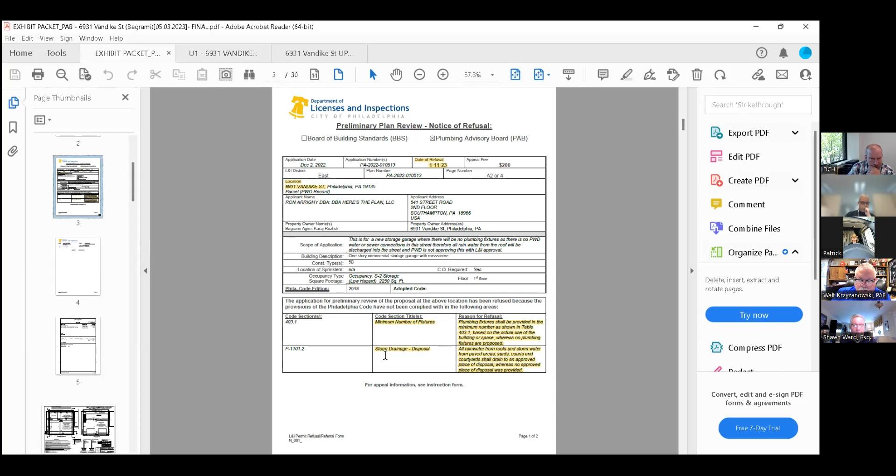We have the plans that were submitted. As you can see, this is basically a one-story garage with an interior mezzanine. It is proposed for the storage of contractors' equipment and materials, and that is it. There will basically be no human occupancy. We're not looking to have an office here, or to do anything other than store materials and vehicles at this site.

Moving through the plans, here's a copy of the deed just to show that he has standing to be here. He is the applicant owner.

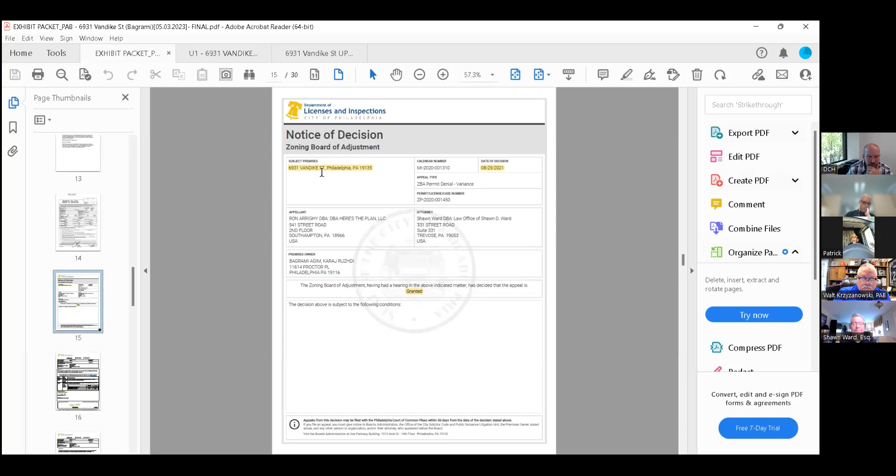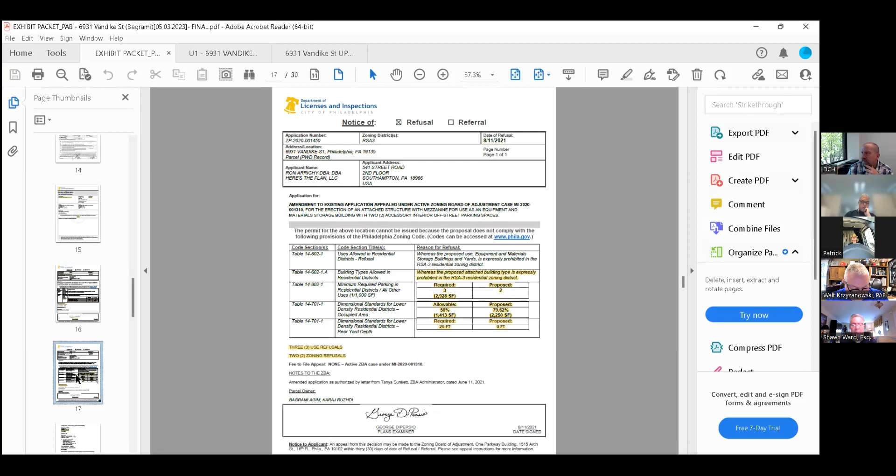The notice of decision from the zoning board granting the variance to construct this building — that was the original refusal. We sought relief for the minimum open area, the minimum front setback, and the minimum rear yard depth. I'd point out to the board that the building was shifted back from the frontage sidewalk to accommodate at least a 10-foot setback, as requested by Tacony Civic. They weren't as concerned about the rear yard as they were about this building fronting right up to the sidewalk, so we accommodated that request, and it was made part of the zoning board's decision. There were also some other variances for parking and density in a residential district. Having said that, Tacony was not opposed to the application subject to those conditions.

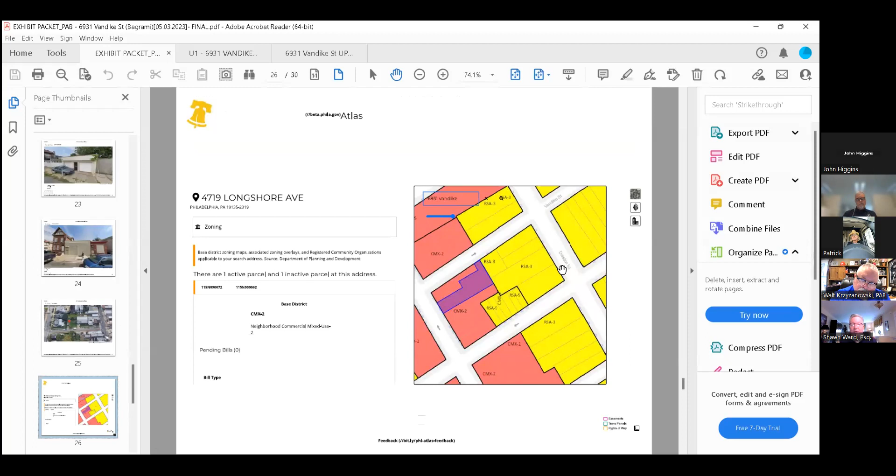John, I'll keep my screen up — oh wait, I'm sorry, let me pull up the utility plan. I shared this with Phil this morning, and Ron Arrighy, our representative from Here's the Plan, shared it at 1:51 a.m. because he's in Europe, sent it to Phil.

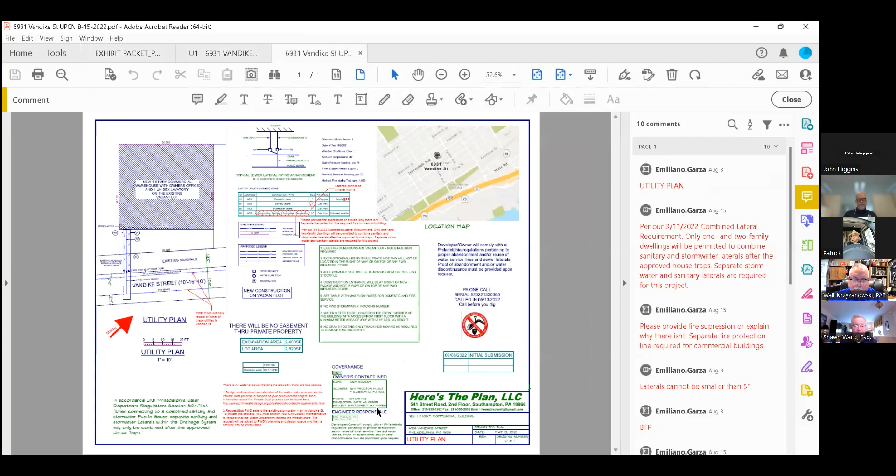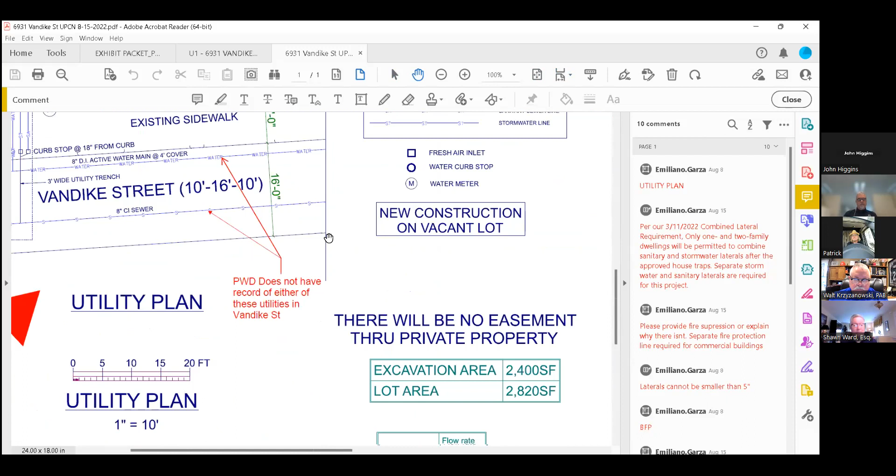I don't know if Phil received it, but yes, we have it. Okay, and it also includes, I believe, some comments from the water department inserted in red, confirming that despite showing on a plan that there are active water mains and whatnot, there is no record of either an existing sewer or water main.

So again, with that, I'll turn it over to John Higgins. John, just let me know what page in my packet you want me to go to, or do you want me to stay on this plan? I'll leave it to you. Yeah, I think his plan is a good starting point.

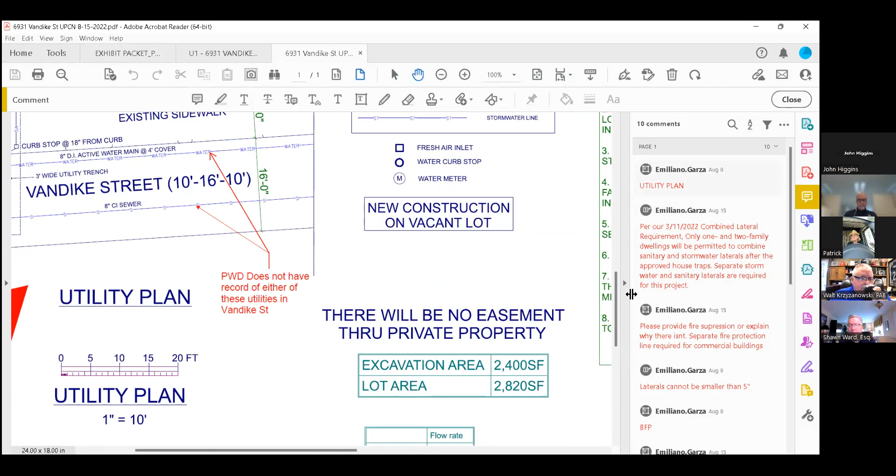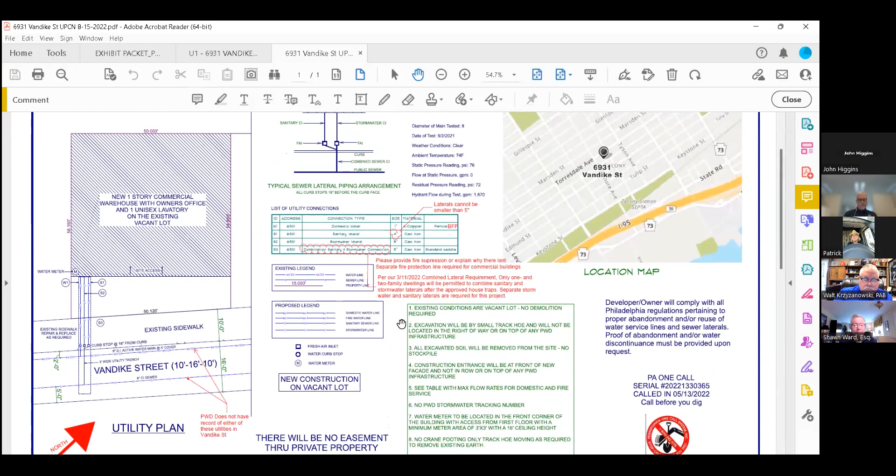The closest existing or known existing sewer would be in Longshore Street, at a distance of approximately 196 feet, or a distance of 164 feet to Disston Street. The owner, obviously, if he were opting to provide a sewer, it would have to be built to the water department requirements, at a cost that is prohibitive given the distances involved.

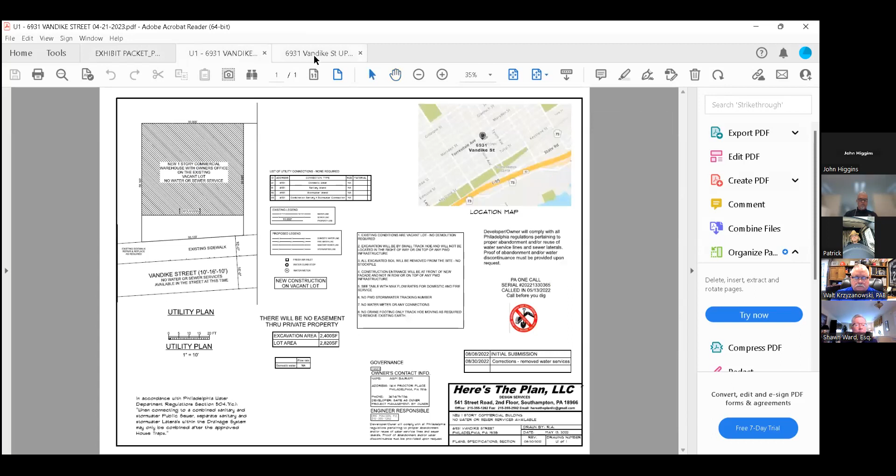What we were hoping to propose, as an acceptable proposal, is if we could manage the stormwater on site by use of an engineered detention system, and provide a holding tank to manage any sanitary water generated from the property. The water to the water closet and lavatory would be provided through the stormwater retention system design, and the sanitary would be held in the holding tank, with the obvious monitoring to notify when that tank would need to be evacuated.

And Mr. Chairman, if I could jump in here, Shawn Ward — considering this is a vacant lot, that makes those two options quite obvious and reasonable under the circumstances, we would submit, because it is a vacant lot, and excavation for those two items or systems could be easily accommodated.

Then as far as providing potable water to the facility, we would propose that be done through an electric water cooler with a water delivery service, to address having some available potable water at the site. So that's pretty much the option that we would like to present, and seek your advice and/or approval or denial of this proposal.

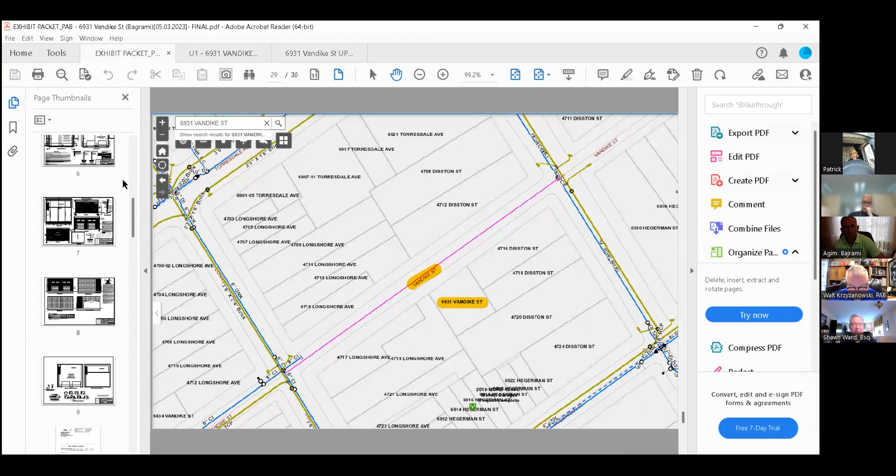Okay, thank you. And you mentioned that to appease the Civics Association, you agreed to a 10-foot setback. That 10-foot setback you referred to — is that front, back, or side of the building?

Looking at the screen share, where my hand cursor is, the original design had the building more or less out towards the sidewalk, with a rear yard to comply with the rear yard requirement. But in order to keep the square footage of the building, Tacony Civic requested that we slide the building back, saying the rear yard would be landlocked anyway and not usable for any purpose other than the accumulation of trash and weeds. They said they'd much rather see the building set back off the sidewalk 10 feet and eliminate the rear yard.

Provided we did a brick front facing Vandike, the northern face of the building would be a brick facade. Since we're attaching to the adjoining building, there was a small portion towards the front visible from Longshore. We agreed that all exposed exterior walls, front and sides, not necessarily the rear, would be red brick.

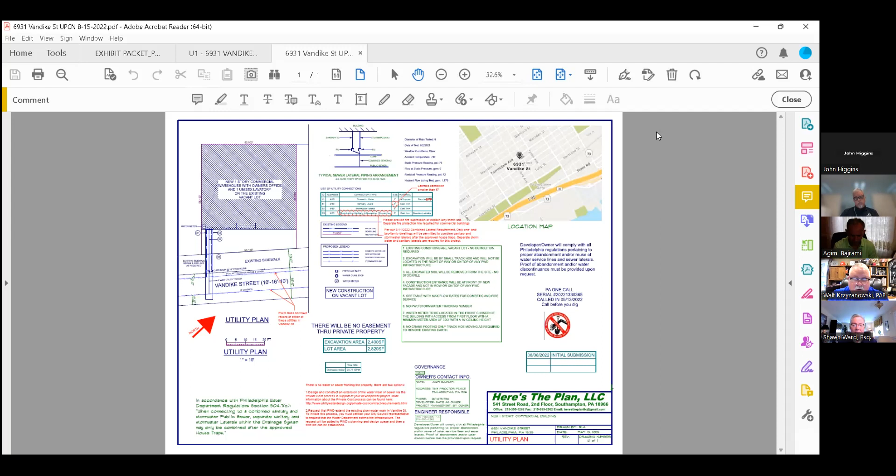That's perfect. And one more thing, and I appreciate your time. Could you go back to the photographs in your package, please? Sure.

If you can keep going with the photographs, you should keep going. Right there. Wait, yep. So that, and there was also that one, and there's another warehouse, I believe, shown in your photographic package. Keep going.

That one, this one, Mr. Chair, and this one are the same property. Oh, this is the front of it on Longshore, and this is the side of it, which is on Vandike. Thank you very much for that clarification.

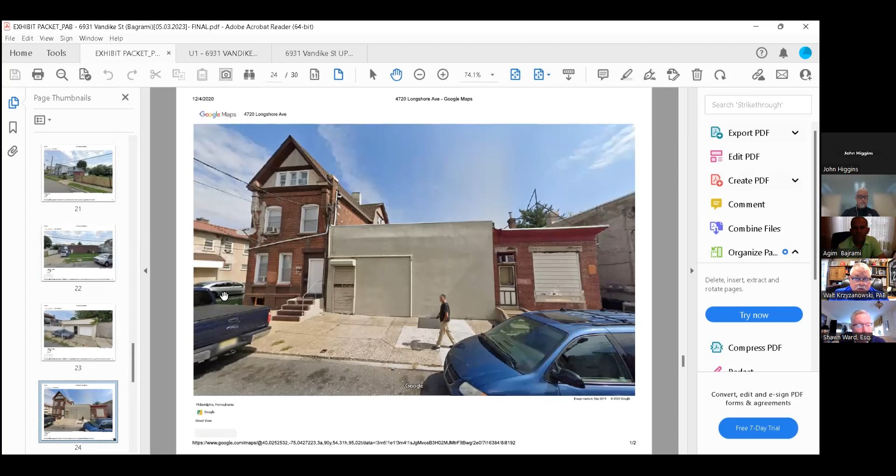So this tan building here is, in fact, this building here. I actually worked in that building. They are one and the same. I worked in there when I was right out of high school. Okay. Oh. All right.

So, Mr. Ward, would you have—and this is a tough question, and I suspect you're not going to have the answer—do you know if that building has sanitary services and plumbing fixtures in it, and where they would be connected to?

I don't know definitively, however, I would assume whatever service is provided to this property is coming from Longshore.

I will ask Mr. Gilbert, he has some knowledge of that building. Mr. Gilbert, do you know where they would be tied into? Yes, there is a bathroom and an office space located on the Longshore Avenue side.

If you see, this building is oddly shaped. It looks like it was two buildings at one point. The larger area is a warehouse. There is no plumbing in there.

There is some rainwater, believe it or not, there may be an on-site retention basin. There's manholes in the building. I never got into one when I worked there.

If you go to the middle, I'm going to call it the middle of the square building, that is where there is a bathroom located. Yeah, right where the hand is, there's a bathroom located there. There's another bathroom located in the front towards Vandike.

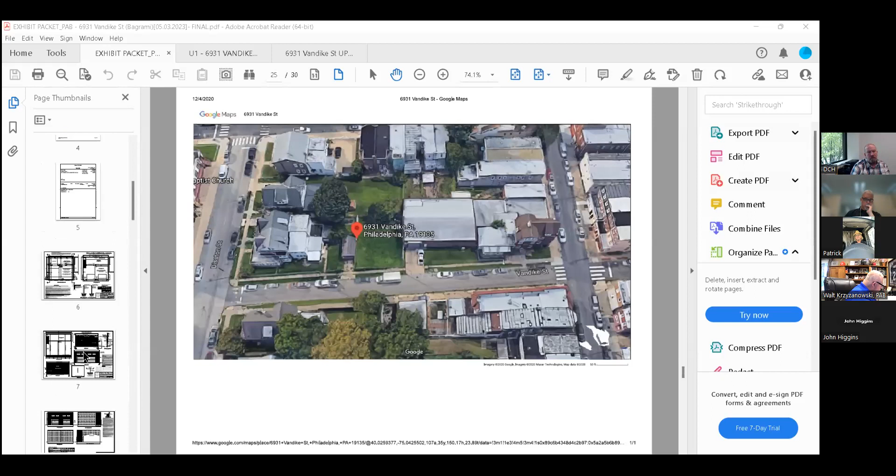Yes, hi, thanks, Walt. I want to start with the design of the building based on what Sarah just said with the roof line. Is this a flat roof or a pitched roof? Looks like a pitched roof. Yeah, it is. What it is, it's a bar joist supported deck, roof deck, with basically a slope to accommodate the water drainage or rainwater drainage off the building. And does this particular design show the exit of the gutter system?

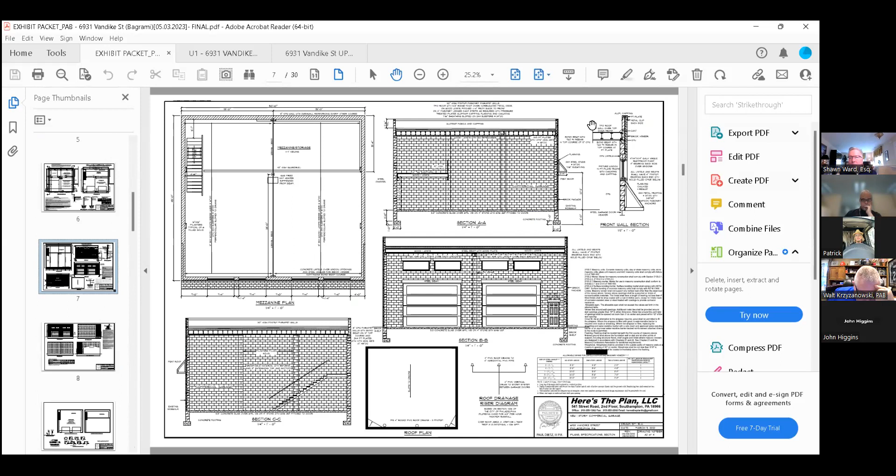No, it does not, with the pitch. I don't believe these plans show that. No. Okay, so that could be decided at a later date. How much pervious ground is currently in this property? Is the building site going to take over from street to back property line and from property side to property side with concrete?

Okay, the lot dimension is 2,826 square feet. The proposed building is 2,244 square feet. The open area at the front would consist of about 528 square feet. But obviously that's going to take in the aprons for the vehicles into the building, and it's concrete. So our pervious surface is virtually zero. So zero pervious space on the property after the building is in there.

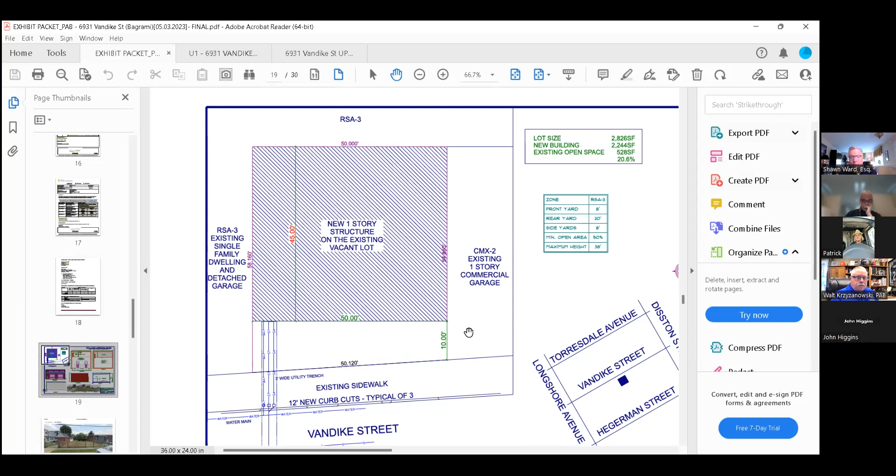Right. Where do you propose, and I know this might be premature because this has been an added conversation for the board, where do you propose the tanks? Are they above ground or below ground? They would be below ground. Everything is below ground, including the rainwater. Correct. Okay, and do you have a location idea of where these would be, inside the building or outside the front apron?

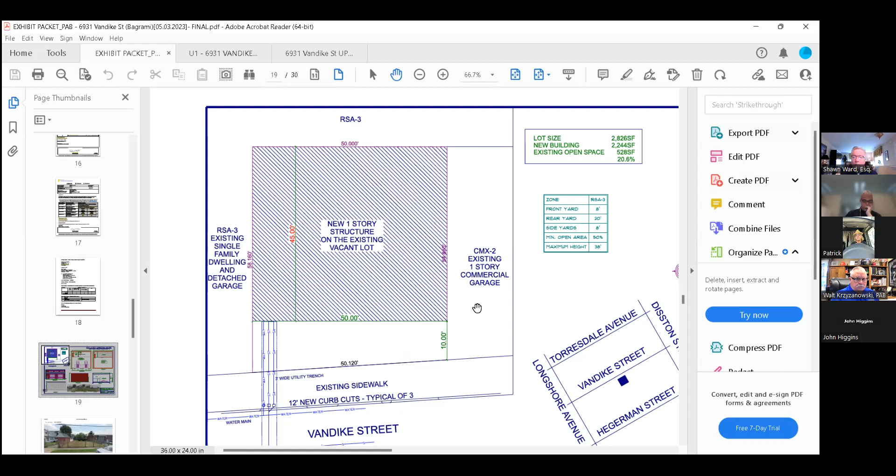No. We would have to defer. We realized if our proposal is acceptable, we would have to get an engineer. So I honestly cannot say with any sort of certainty. My impression would be within the building. Within the building, okay.

Something that came up for me in this conversation is, why must we consider the office, if it's just storage of records, an actual office? And the question I would have for Shawn, if there was no office in there and this was specifically a garage for storage, would there be a requirement for a powder room, a water closet with a lavatory?

I can answer that, I'm looking it up right now. I was thinking the same thing, give me a minute. Thanks, Bob. For the record, we don't need an office. The intention is for storage - he needs someplace to store his tools, equipment, and materials.

I want to get the language from L&I on that. Walt, are you answering that question right now? If you could bring up A2 for Patrick, it does show the roof drainage he was questioning. There's also some vertical leaders shown.

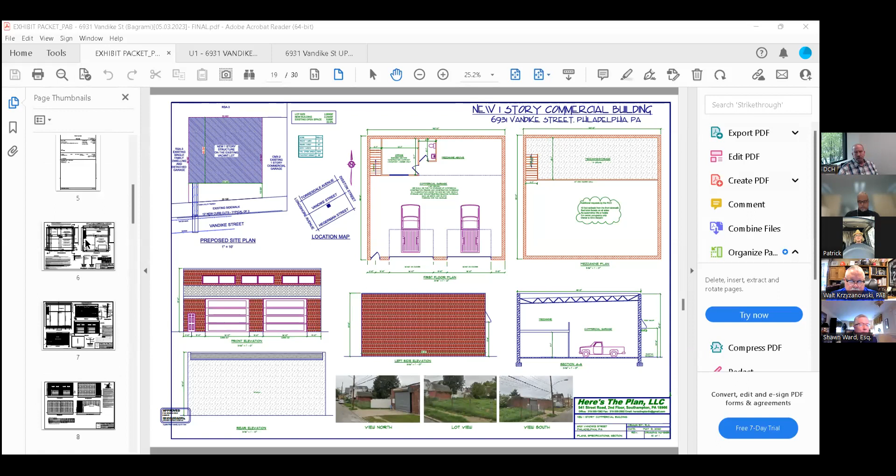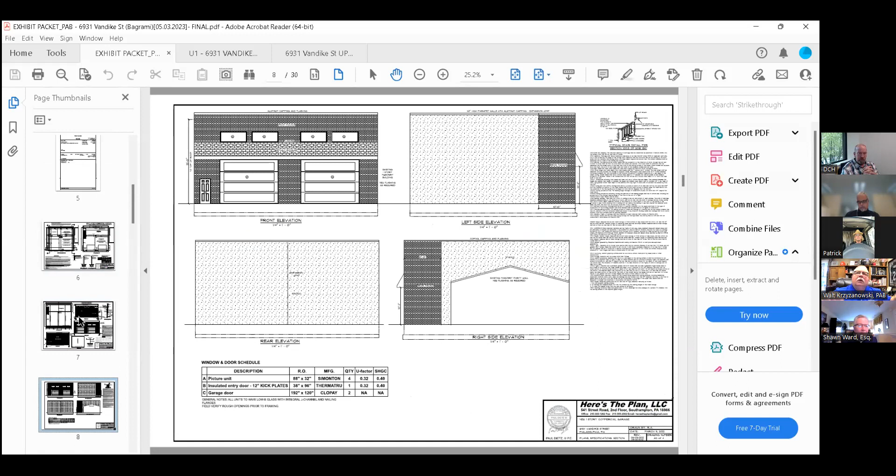It doesn't make a lot of sense that there would be more than one drainage, as Sarah specified or questioned. It really doesn't matter to me. With the answer Bob is providing, I'm more interested in seeing how the drainage works - we talked about the stormwater holding tank and how it would drain slowly, but how it could have an overflow instead of just a sensor. The sensor could tell you how full it is, but an overflow is required on any kind of water holding tank, in everything I've ever done.

It normally goes into the sanitary sewer. In this request, it would be going back into pervious ground, and I guess that would have to be an approval from not only us, but the water department.

Patrick, to answer your question - in chapter 4, we go to storage, structures for storage of goods, warehousing, storehouses, freight, and that's probably what's there. If they propose this building be used for that, you need 1 per 100 for water closets, male, female, lavatories. So it is required. It goes even further - you need a service sink and a drinking fountain. So it is required, meaning they would need a variance.

And that's this request, right? I'm going to end this. Well, Sarah, to your point, we're here seeking an advisory on relief, so it's not a blanket request.

It's not one request in our eyes. We're here before the advisory board seeking your advice on what kind of relief we might be entitled to or be granted. We understand that, and what I'm trying to do with my questioning is get to the bottom of what the law is requiring and what it requires compared to the hardship presented with this particular property.

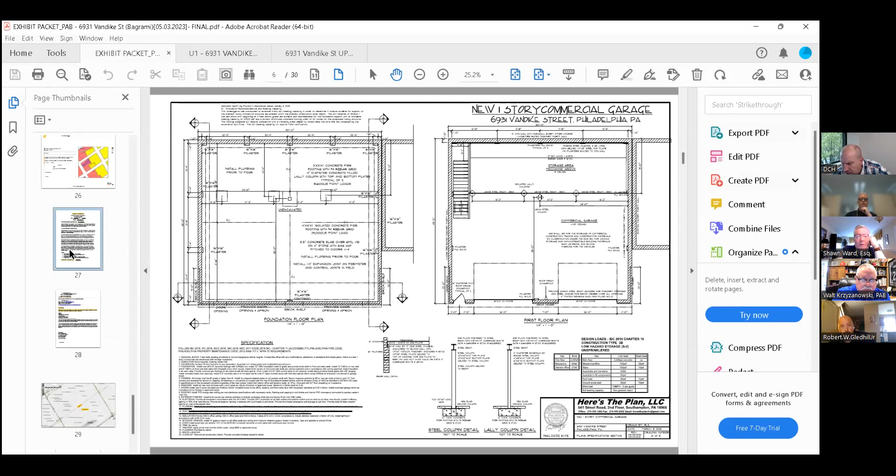It is in the packet. Let me share it again. It's in the zoning package that was sent out. I'll tell you what page it's on - just bear with me one second. Okay, as long as we have a copy, I just wanted to read it. That would be at page 27.

Board members, any follow-ups from the board? No, nothing here. All right, hearing none, what we're going to do now is, Mr. Kelly, we are now off record.